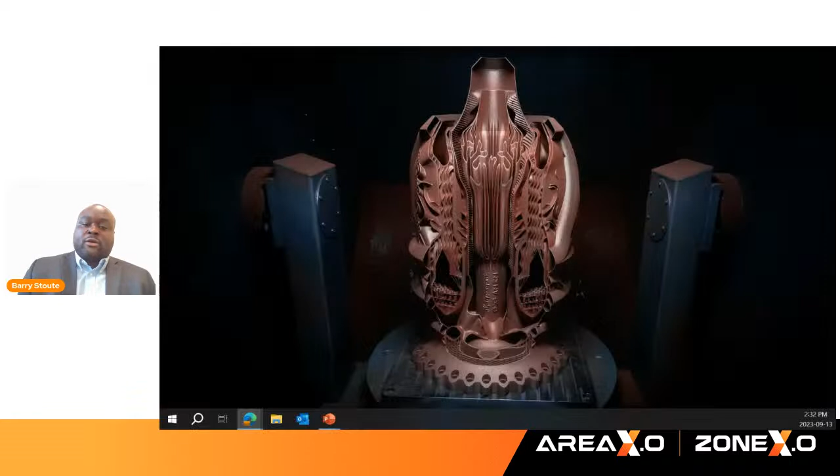Thank you, Patrick. Hello everyone. My name is Barry Stoute, and I'm here to talk to you about the role of simulation in modern defense, security, and aerospace operations.

The agenda for the seminar is as follows. We will introduce the Area X.O simulation team, then dive into what is simulation and which areas we will focus on. Then we have a brief description on finite element analysis, computational fluid dynamics, and afterwards a deep dive into digital mission engineering. As Patrick alluded to, we will pause for questions midway through, so we could answer them and make it more interactive and engaging.

After the pause, we're going to continue with digital mission engineering, then do a cost model example, followed by an actual example using all the simulation tools we have. Then we will have a conclusion, talk about the simulation portal, and have further questions.

First, I will introduce my colleague, Hossein Sami. He's an aerospace engineer with a master's degree from Carleton University. He is a simulation engineer at Area X.O with extensive experience in aerospace industries, including drones, aircraft, rockets, and satellites.

About myself, my background is in propulsion and power. I earned my doctorate degree in classical propulsion at York University about 10 years ago, so I'm kind of dated. I did a postdoctoral fellowship doing work in energy systems, both in the nuclear industry and in thermoelectrics. I started working at Area X.O since November 2022, so it's about 10 months now.

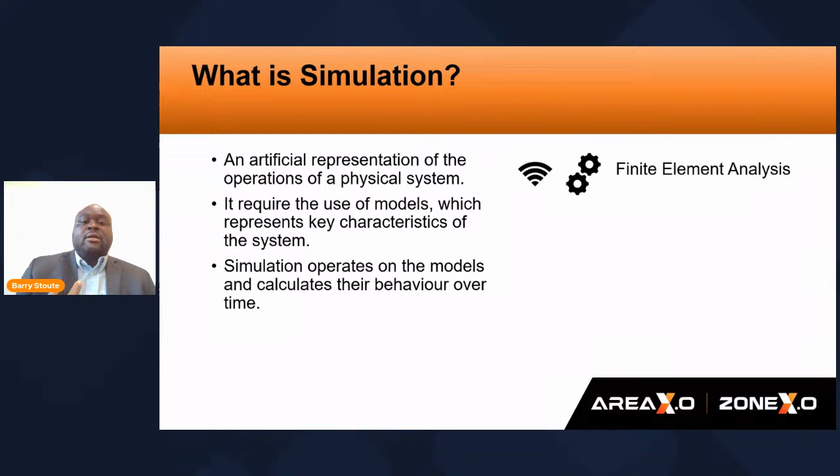There are three types of simulations we will share in this webinar: finite element analysis, computational fluid dynamics, and digital mission engineering.

Starting off with finite element analysis. So what is finite element analysis, or FEA? It's a numerical technique to solve physics models. It takes a model and creates meshes of small elements. Each element is solved individually with initial and boundary conditions in a large matrix.

One of the two FEA tools we have here at Area X.O is ANSYS Electronics Desktop. It is primarily used to simulate electromagnetism. Note that Electronics Desktop does more than just FEA—it uses other solution methods like shooting bouncing rays, but that's beyond the scope of this webinar.

We have toolkits that perform FEA for antennas, electric motors, electronics cooling, signal integrity, and more. Developing robust electronics and antennas for vehicles is crucial for longevity of missions, especially when working on satellites and long endurance aircraft.

So what does simulation provide for electromagnetic design? First, we understand electromagnetic patterns of antennas. Then we also understand defining the radar cross-section of objects—let's say from a station to a certain satellite in space or to a certain aircraft.

This is also important for getting the antenna's far field pattern. Now pay attention to this feature, it will be explained later on. And finding optimal operation temperatures for the electronics.

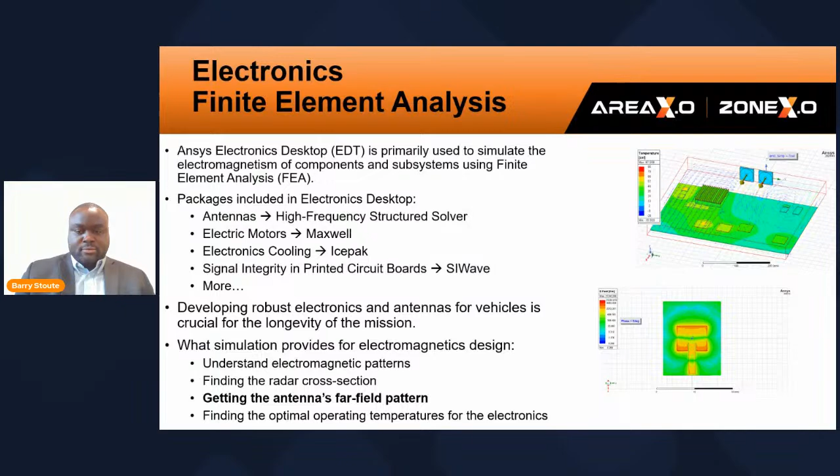Another FEA software we have here is ANSYS Mechanical and Thermal. Both of these FEA tools are critical across industries. It's used basically everywhere - to name a few, they're used in manufacturing, aerospace, defense, and more.

What does simulation provide for structure design? We look at failures of structures, so fatigue, cracks, and so forth. And then we have thermal stresses, so let's say, for example, creep from a turbo machinery blade. Also, it's important for modal analysis - essentially the frequency of modes and how it might provide failure during that point.

Here are a couple of examples. The first example on the top is a set of gears actually showing the total deformation under mechanical stress. And the bottom is an RC car going under thermal loading, so you see the temperature distribution in a very hot environment, like a burning building.

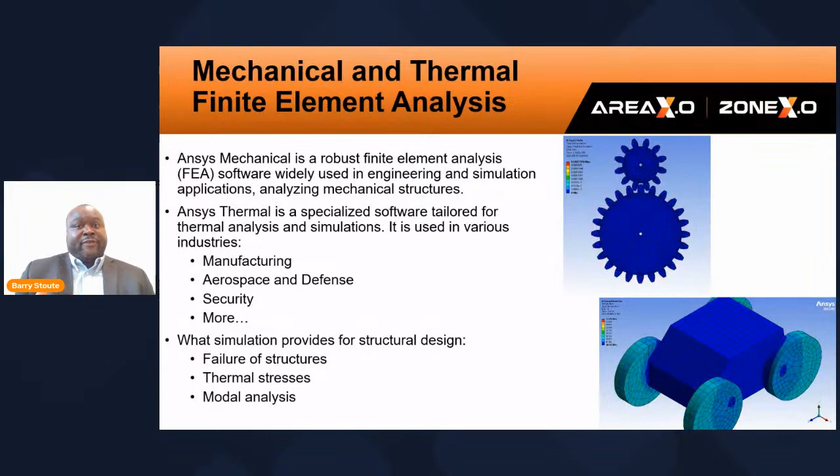So now we're going to computational fluid dynamics. What is computational fluid dynamics? Similar to finite element analysis, CFD breaks down the model into little finite volumes and computes them using Navier-Stokes or heat equations. So what's the difference between FEA and CFD? Finite element analysis converts a set of partial differential equations into ordinary differential equations using the stiffness matrix. As for CFD, it discretizes partial differential equations and integrates them over a volume.

CFD is used widely in many industries - aerospace, naval, manufacturing, even energy systems, and so forth. So what value does CFD hold for engineers and scientists? You can find the lift and drag of any object, like a car or aircraft, solving for structural thermal loads.

So you have an aircraft wing flying through the air at 30,000 feet. You have this CFD model, and based on that, we can get the structural thermal loading of the airframe.

We can also evaluate environmental impact, like finding the spread of pesticide from a drone spraying area - if the pesticides spread too much and cause other damages beyond the crops. And aeroacoustics, so how loud the drone is operating during its operation.

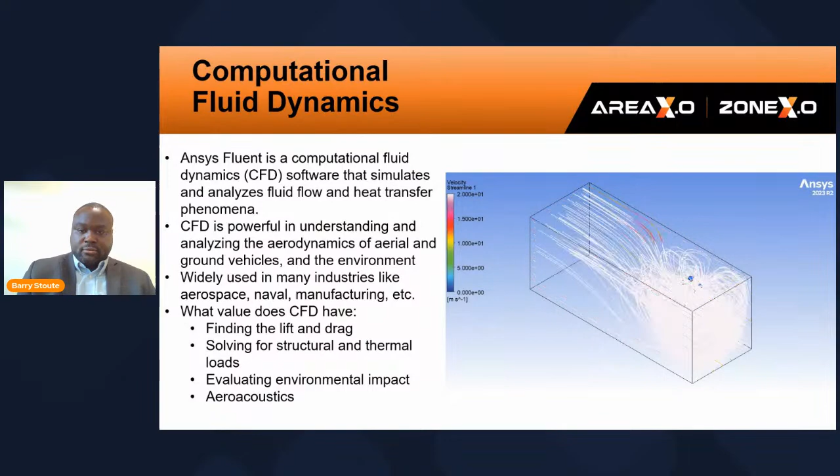Now we come to the heart of the webinar, digital mission engineering. So what is digital mission engineering, or DME? It is the engineering and execution of complex missions by creating virtual representations of the environment. Systems Toolkit is a premier digital mission engineering software from ANSYS government initiatives. This product is primarily used in aeronautics, astronautics, and defense, but it can also be used for telecommunications, agriculture, connected and automated vehicles, and more.

STK actually creates digital twins of aerospace and ground vehicles - so you have jetliners, or like a truck, or a boat. It also does digital twins of sensors, radar, thermal, EO/IR, the terrain, and atmospheric conditions like rain and fog.

Using digital simulations, mission engineers can explore various what-if scenarios, test different strategies, and make informed decisions while avoiding costly physical prototypes. Just a tidbit - in the background you see is actually a 3D image of WorldView 3, which is currently in operation.

So let's explain the typical life cycle of DME software development. We start by having an engineer thinking about a scenario anywhere around the world - it could be the Arctic, the Middle East, Asia, Africa, wherever. Thereafter, he places his asset, whether it be a drone or a satellite or an aircraft or a ground facility, doesn't matter.

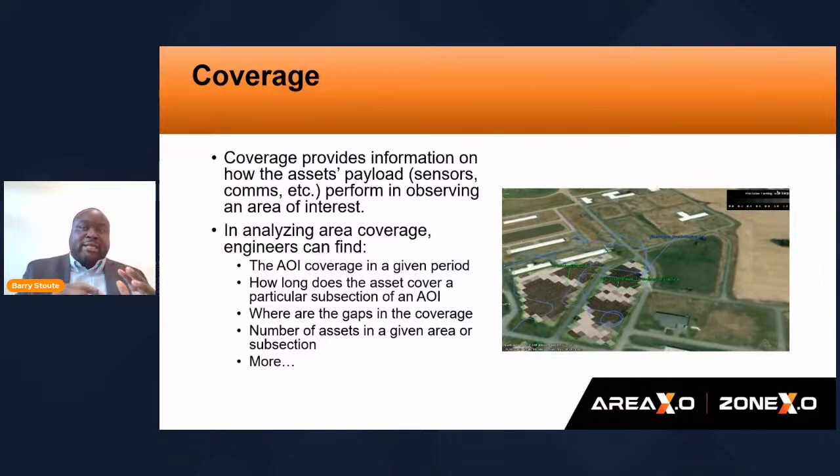So it could be the area of interest coverage in a given period of time. How long does the asset cover a particular subsection of an area of interest? So let's say you have Canada. You want to know how often does it cover Prince Edward? Where are the gaps in the coverage? So if you have the Arctic and you're having a satellite system, how often that satellite system does not spot that particular area or doesn't cover?

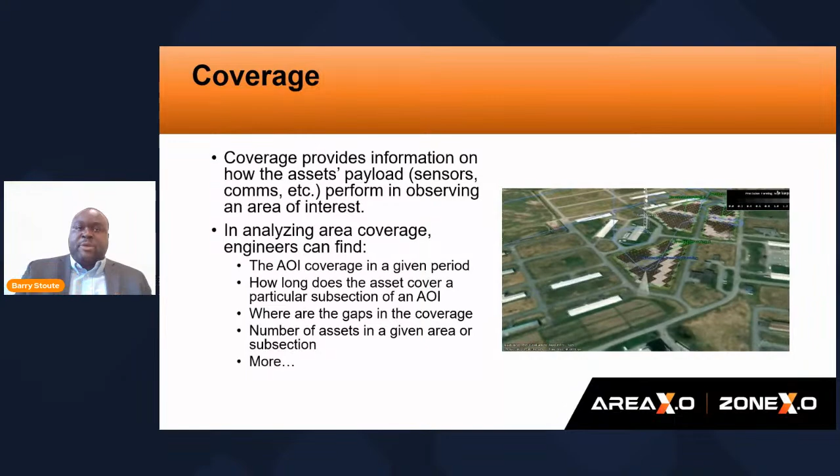And number of assets in a given area or subsection. So we have GPS satellites. You have at least 4 satellites available such that they could actually have a proper GPS location and more.

So we go into another package called STK Communication. So this simulates broader signal strength. It provides a range of capabilities for engineers and analysts to design, visualize, and assess various aspects of communications, such as link budget and communication coverage.

STK Radar simulates the effectiveness of radar systems in detecting objects. So it's basically the same electromagnetic package as STK Communication, but rather we're calling on purely radar performance. This will provide output like signal noise ratio, pulse integration, probability detection, and more. So this package also simulates the radar cross-section given from the user or been calculated and through the ANSYS products.

The software has an antenna model as well for engineers to use in DME simulation for radar as well as communication. Antenna models are implementable into vehicles, satellites, and ground stations, just to name a few. These models are including parabolic dishes, monopole antennas, phased arrays, and more. There's a heap load of antenna models.

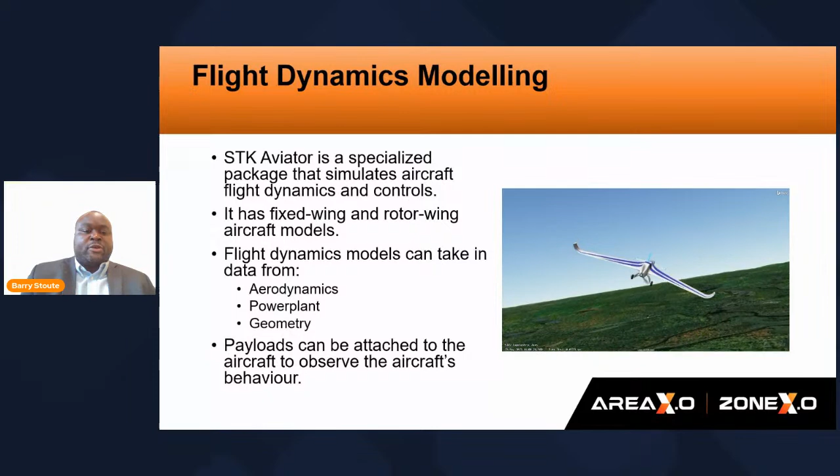So what Area X.O has specifically with STK is Aviator. This package specializes in aircraft flight dynamics and control. The package has both fixed wing and rotor wing models, ranging from commercial aircraft, such like the 747 jetliners or Cessna, to military aircraft like a helicopter or the F-35s. Data from the aerodynamic power plant and geometry can be fed into the flight dynamics model. Engineers can attach different payloads to the aircraft to observe the aircraft behavior.

Now we have a quick pause, and I want to know if there are any questions so forth.

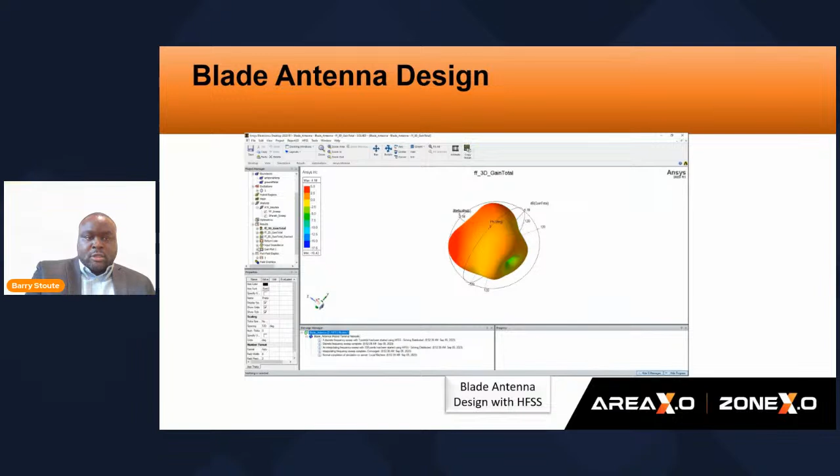So now the first thing we're going to see is the beamform - we see the beamforming, the antenna, the EM pattern coming from the blade antenna. We'll also see the gain plots for the far fields. Based on what we have here with the antenna pattern, we're going to go ahead and export it - we export the far fields, and we'll say that this is for the STK model, the STK simulation. And that's it.

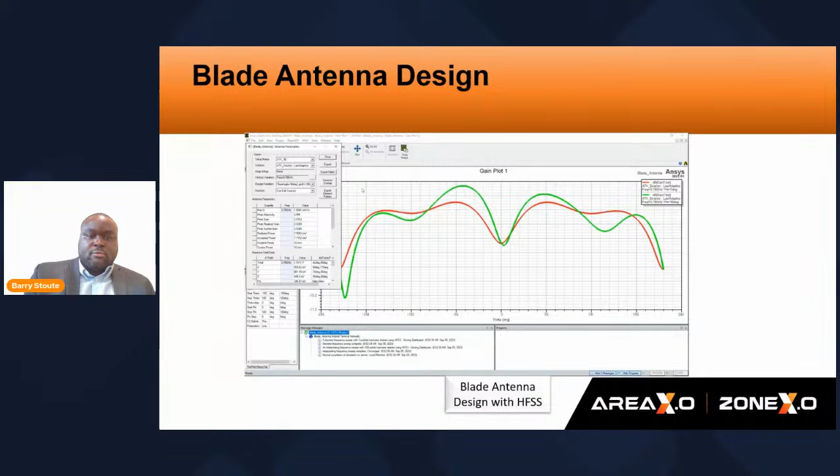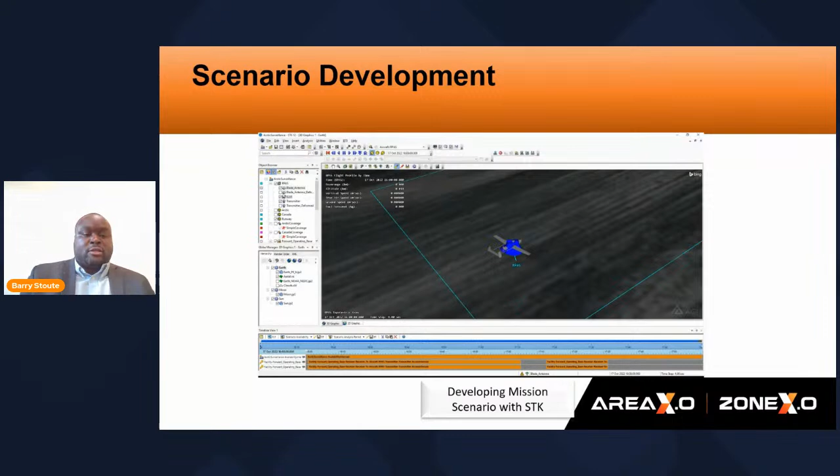Continuing on, we have STK Aviator. This is where we actually design the aircraft dynamics, the flight dynamics, and the pattern. We could give the aircraft a flight plan and actually change it - we can adjust what we need on the fly, and STK calculates the flight dynamics of it. If there's an error, it will say, well, this is impossible - the aircraft might fall out of the sky, or so forth.

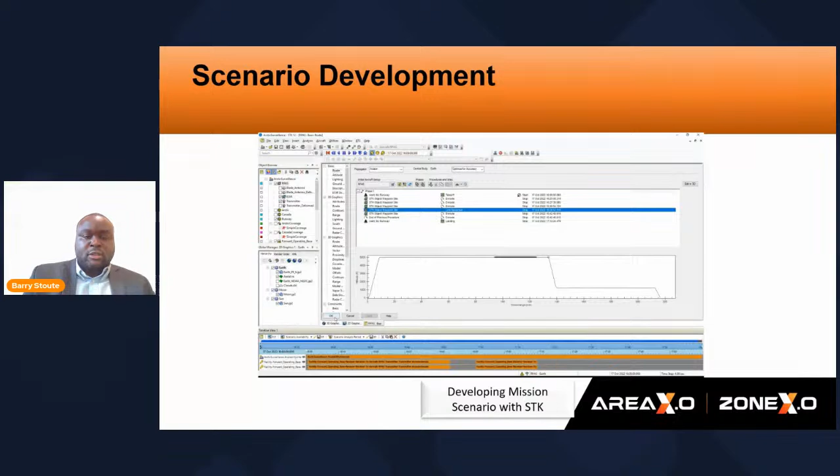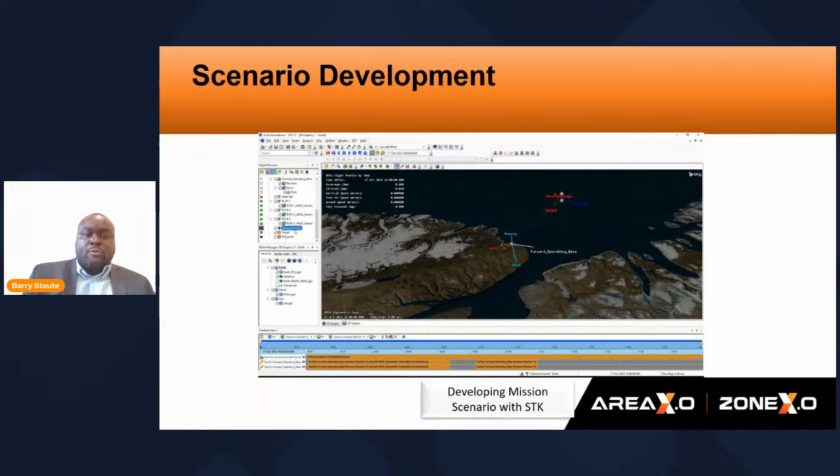Okay, now we'll zoom out to the problem space. We see our waypoints, and then we'll zoom into the unknown vessel - let's say this is an icebreaker. It's in the middle of October, and we see the flight path of the aircraft. So we know what's going to go on, and we see that this scenario is ready.

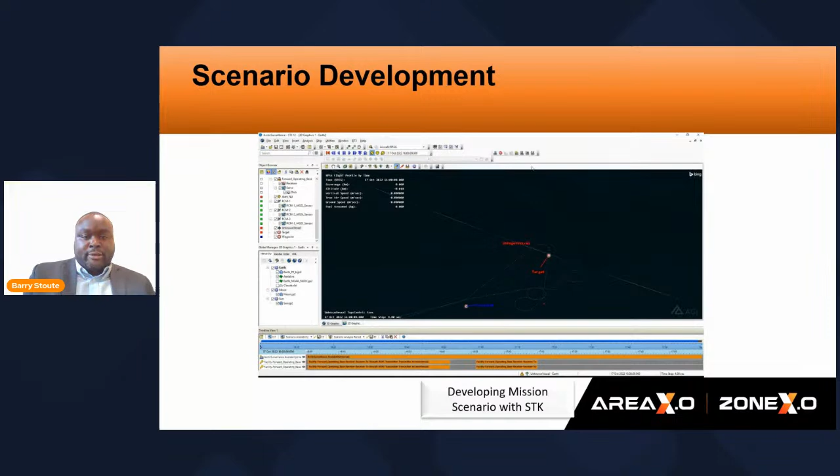Here's a snippet of the result of the simulation - this is an RPAS passing near the unknown vessel and taking images. Here's something interesting I want to point out: you see these numbers here? This is a real-time simulation of the flight pattern of the aircraft. STK actually calculates the downrange, how much fuel it will consume, the wind speed, true airspeed, ground speed, and even the static temperature.

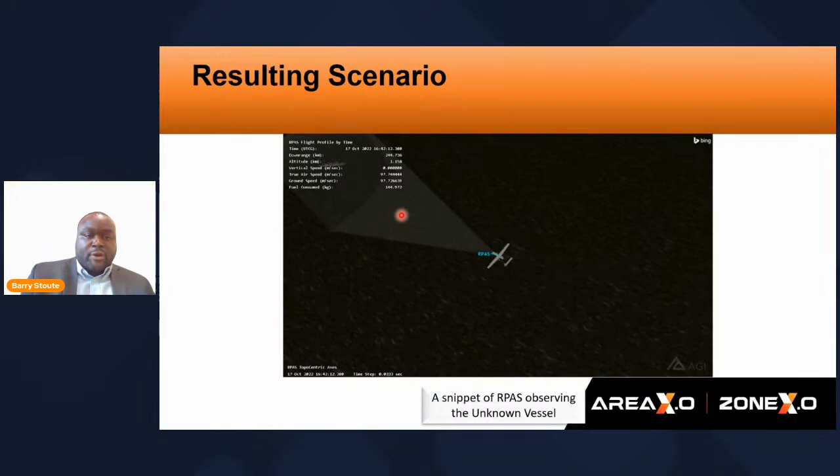Now, the conditions we obtain from the STK can be transferred to our CFD FEA model. So what we do is take the initial temperature of negative 11.3, which is the temperature of the air at the time of the scenario. We took the inlet wind speed, the inbound wind speed at 97.74 meters per second, calculated by STK. We add a crosswind speed of 10 meters per second to give more complexity to the problem, and we put the wind temperature at negative 21.2 degrees Celsius. The negative 11.3 degrees Celsius is either set by NOAA or by us looking at the weather channel for the temperature at the time. At STK we actually calculate the air temperature at that altitude. And the material for this is copper.

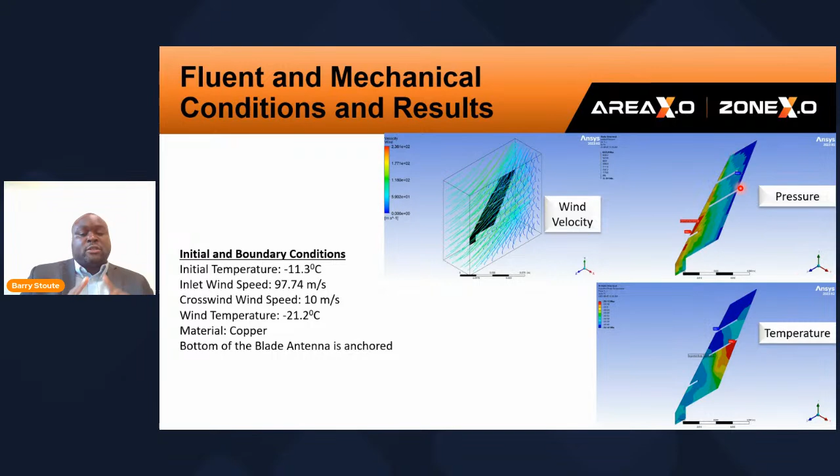So the wind velocity here is the result of the fluent simulation. Based on that simulation, we can transfer the information to mechanical to get the temperature and pressure results, and these will fit as initial conditions for the structural mechanics.

The mechanical results show the total deformation and the von Mises stress, which are essentially equivalent stresses. The stress results show a high concentration of stress and a chance of failure at the bottom of the blade. That makes sense because the blade antenna is acting like a cantilever beam. And for the total deformation, we see it is at the top here.

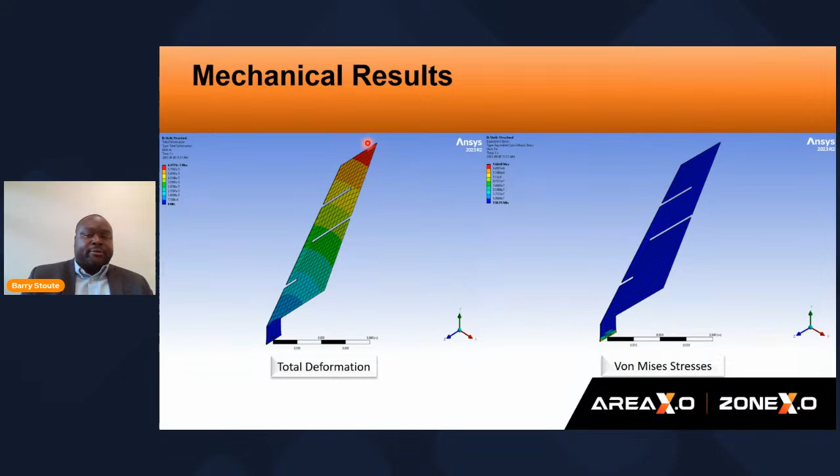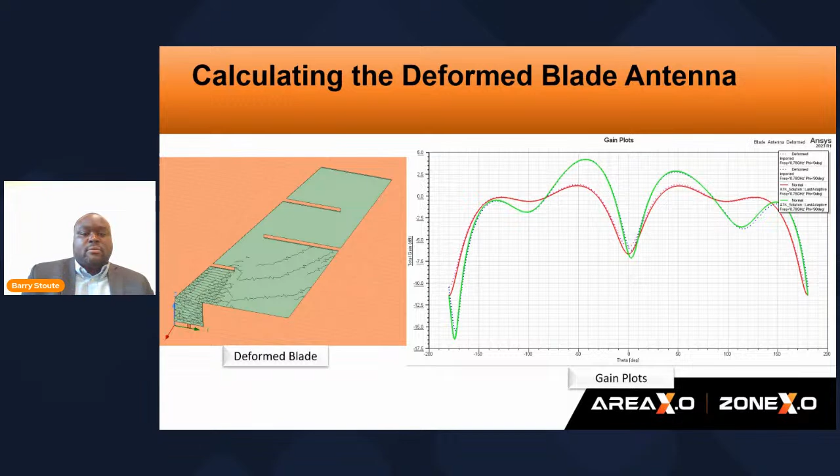We see that there is very little change, and no significant difference in terms of performance. We can see this in the carrier to noise ratio in STK. The green is the intact blade antenna, while the black is the deformed antenna. Now, of course, it should always have a weather dome, but the point is we want to exaggerate and show the power of simulation when it comes to predicting the performance of the blade antenna.

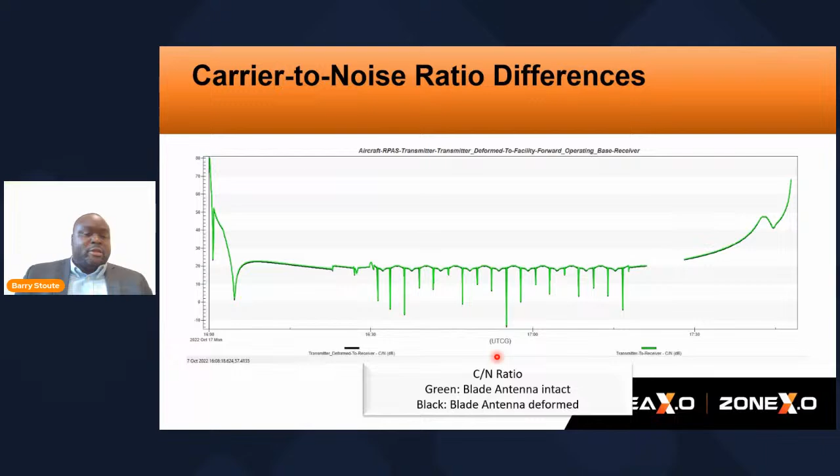So there you have it. In conclusion, simulation is a powerful tool that helps with cross-analysis, performing multi-physics analysis using multiple engineering tools: STK, Fluent, mechanical, thermal. Engineers and scientists can analyze products' performance throughout different environmental conditions. It spurs innovation and creativity without going through expensive manufacturing, and also allows engineers to optimize their designs.